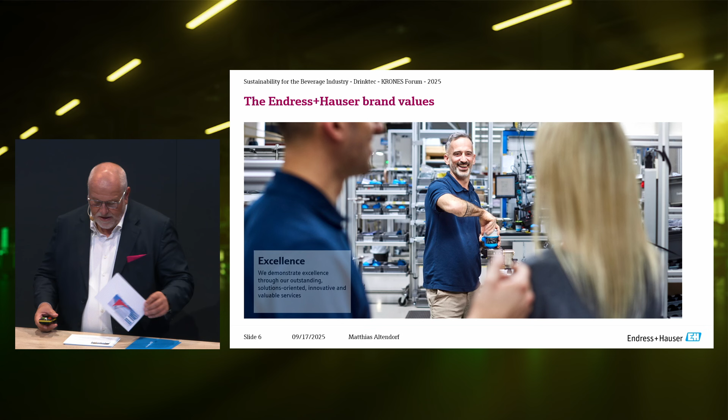We even have it in our brand portfolio, because Endress+Hauser has sustainability as one of our main brand issues, and we have had this for more than 20 years in our corporate profile. We believe we should not just live in today's world, we also have to make sure the future world is taken care of. We try to do this with strong commitment, excellent behavior, and always with a smile on our face.

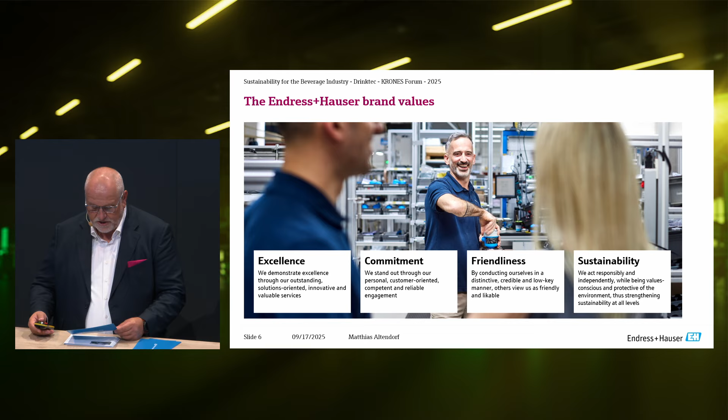Before I go to the different scopes of CO2, I'll start with scope 1, 2, and 3. We have a very powerful lever when we use instrumentation, and I'll give you a good example. Today in the measurement control world, we talk about 2-wire devices and 4-wire devices, and we can offer both. Both have advantages and disadvantages.

Basically 97% of our carbon footprint comes from the material of the products or the usage of the product. Only 3% we can really influence on the other side. So within that 97% of product usage, one factor is energy consumption. A 2-wire device, over 15 years, needs only 0.05 kilograms of CO2. But a 4-wire device, for example, already needs 2.3 kilograms, equivalent to about 2.3 years of a tree's carbon footprint. So minimizing the energy consumption of our products is one of our strengths, and that's one element.

Besides that, let me show you application examples of how we help our customers reduce their carbon footprint in manufacturing.

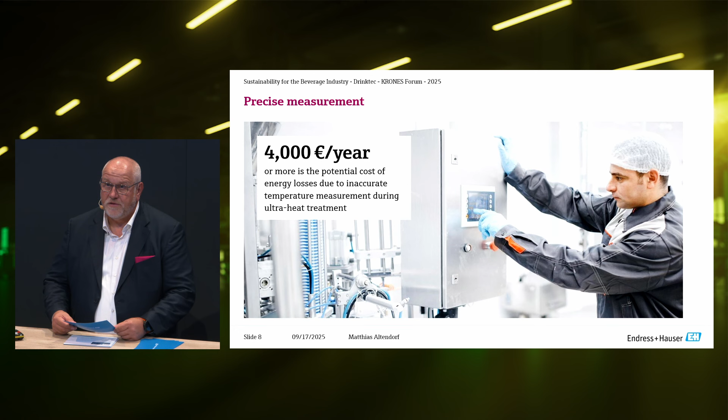Here's an example of precise measurement: you can save energy, raw materials, and cost. This temperature measurement alone can save 4,000 euros a year, simply because it's more precise and self-calibrating. Temperature measurement is very important for ultra heat treatment, as one example, in order to save cost.

Another example is the CIP process in the food and beverage industry, which takes a lot of energy, detergents, cleaning, and water. When you use Endress+Hauser products here, you can reduce the cycle time by 15 minutes, shortening the CIP process. We are able to do that with our customers, saving a lot of water over the day and over the year. But most importantly, we can produce many more bottles for the customer, creating much higher revenue. In such a case, for a normal drinking plant manufacturer, we can save up to €550,000 a year, which becomes very beneficial.

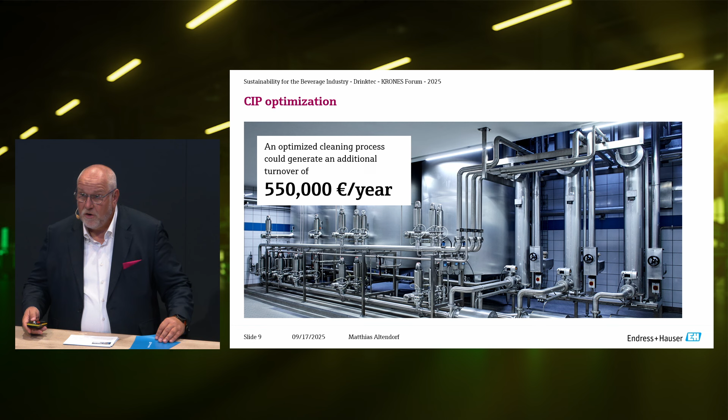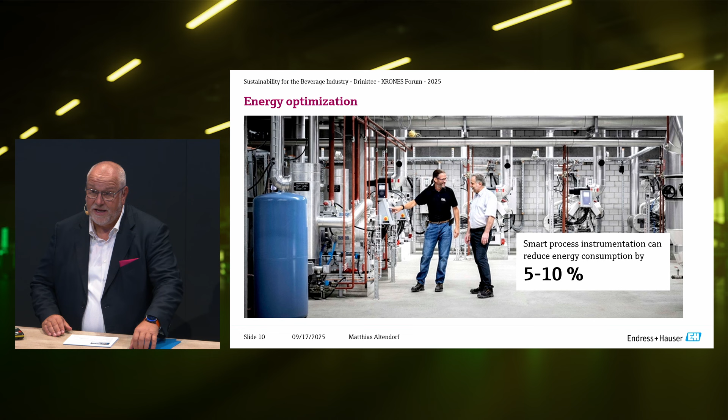When you look at the energy needed for production, a lot of people still use legacy-type heating, ventilation and air conditioning measurement to try to get good energy readings. But today, if you use process equipment, you become much more precise. You can measure variety and dynamics much better, and save up to 5 to 10% in energy consumption. We've proven this concept across all our factories—19 factories—and we changed them all over, so we can really say it works. A lot of our food customers do the same now, because precision helps you control the process better.

You can only optimize what you can measure. The better you measure, the better you can optimize.

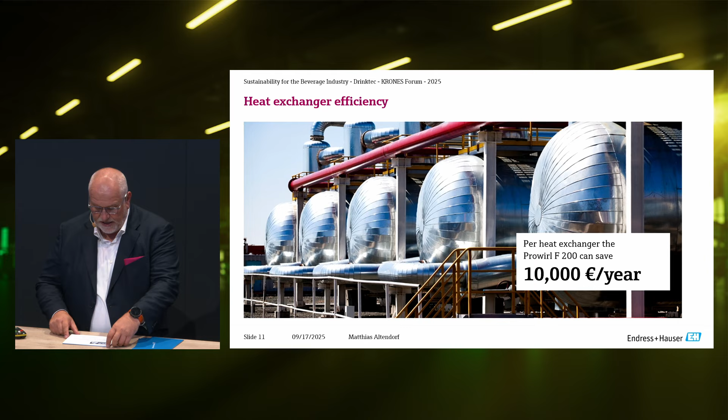Heat exchangers, we have quite a lot in the food industries, and it depends a little bit what you use. Traditionally, people use pressure transmitters to measure the flow of heat exchangers, but maybe for the condensed water you can use ultrasonic flow meters or vortex flow meters, and that helps you save 10% of the liquid water over the year, or helps you be more accurate. At the end of the day we can calculate 10,000 euros savings for a single heat exchanger over the year, and the return on investment is less than 6 months normally in this time frame.

But it's not just enough to say, okay, how can I adjust the processes? Of course, a lot of our customers also produce stainless steel. So we help our customers to produce green steel, using hydrogen to replace coke. And the aim is basically to reduce the carbon footprint by 95%. All around the world we are active in those projects because we would benefit as well to reduce the stainless steel carbon footprint significantly. And this is also our intention, that over the years to come, we reduce the carbon footprint through stainless steel.

In those types of equipment, you need a lot of hydrogen, you need a lot of electrolyzers, and they also need to be controlled and measured, and therefore we help the customer to do that. But electrolyzers also need water, and we are experts in water measurement to do that.

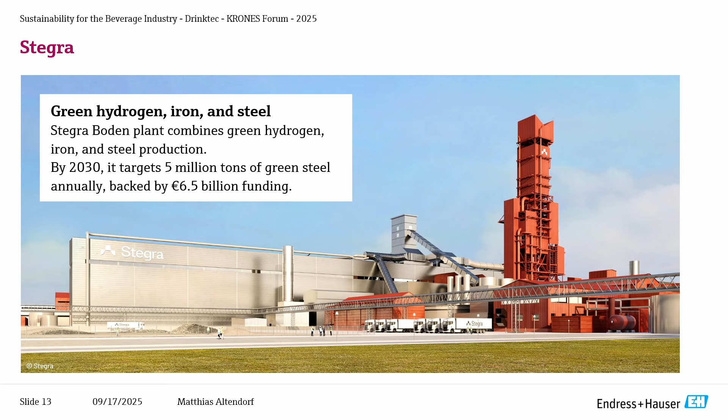When it comes to green hydrogen, iron and steel, you can see here the Stegra plant in Boden, Sweden, where people also want to produce these things, and we are very active in helping our customers produce CO2 neutral steel, which later on we all can absorb and use and recycle again, which makes it a much better thing. It's much easier for us today in the aluminum and steel world to use recycled material in Europe—up to 70% or 80%, and aluminum up to 90% is already recycled. We are not at that level when we look at the Asian markets, because the recycling rate is not as high at that point.

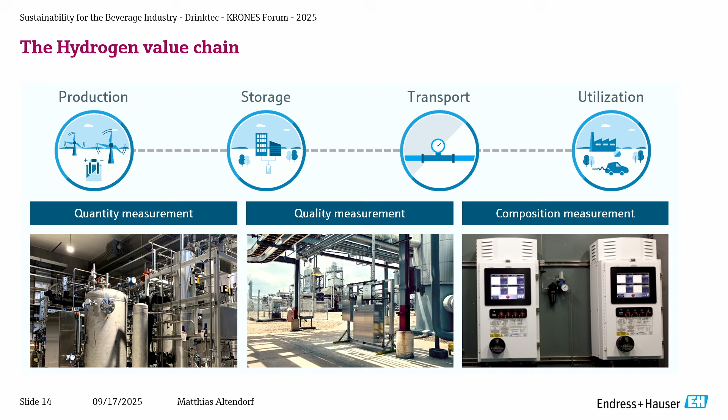When it comes to hydrogen, we help our customers measure it to reduce energy used to produce hydrogen. This is something completely different, and you can reduce it or produce it on the spot. You have to make sure the hydrogen has the right quality in order to use it, and also make sure you transport it and measure the values, and that the composition of the hydrogen works in a quite good way. So it goes from transportation to logistics to quality measurements of the hydrogen, which people then use to create energy or chemicals, and this is well needed. This also helps the customer save a lot of energy.

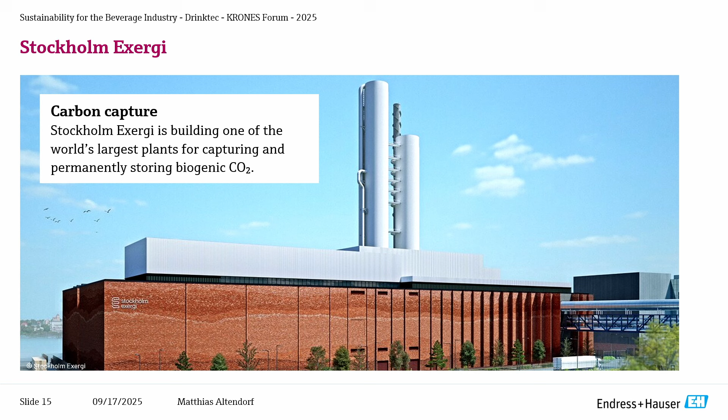But sometimes the process doesn't allow you to use alternative energies, therefore you have to capture the carbon footprint, capturing basically the CO2. You see here Stockholm Exergi, a leading Swedish energy provider, and they liquefy the carbon footprint and later on store it underground. Here we help on two sides: on one hand, they can use bio energy; on the other hand, we capture the carbon footprint with measurement and therefore reduce the carbon footprint of the energy they provide to their customers.

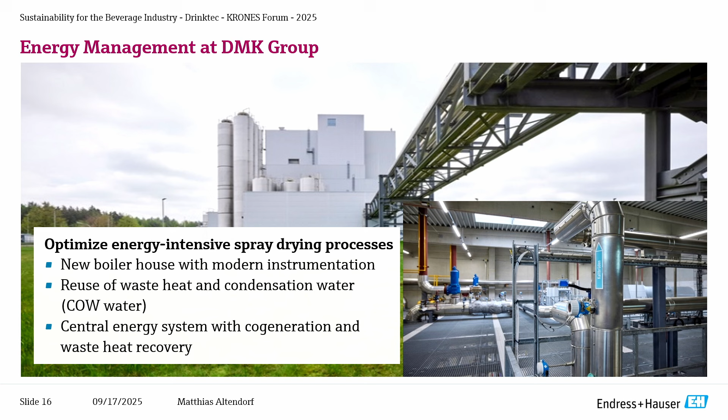Then you have a simple application of energy management at the DMK Group. Here they have a spray drying process, quite often used to make solid food at the end of the day. You can see a new boiler house with the new condensation water and central energy system. Here we are also able to help the customer significantly reduce the spray drying process and generate energy in a much more efficient way. This has helped this customer become much more sustainable.

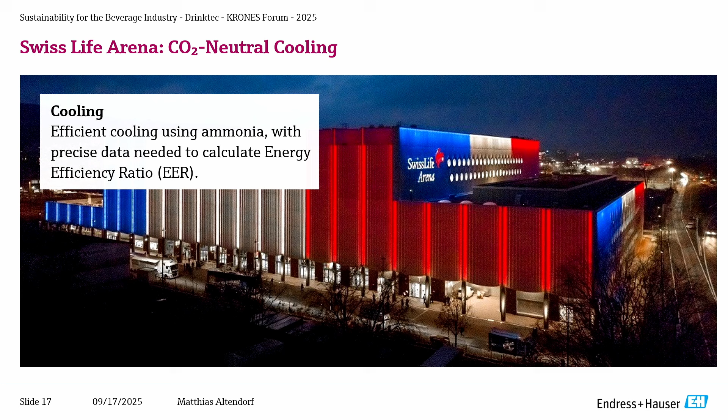But then we also have the buildings, as you can see here. This is, for example, an arena in Switzerland, and a lot of our manufacturing facilities or office buildings look pretty much the same. We're using ammonia here for the cooling process, and therefore you need much more precise data to calculate the energy efficiency ratio. Endress+Hauser provided the compact high-accuracy packages to measure flow, pressure and temperature for this calculation. Again, going from heating, ventilation and air conditioning instrumentation to process instrumentation helps you bring down the carbon footprint and save a lot of energy, just by starting to measure in a precise way.

Sometimes we don't want to store the CO2. Sometimes CO2 is quite vital for the process. Then we use it for feedstock and breweries, helping the customer to capture it, to store it. And then when the customer brews something, we try to bring it back into the process so that this brewing process becomes more efficient. And of course, it's much better if we reuse the CO2 than if we just leave it to the air.

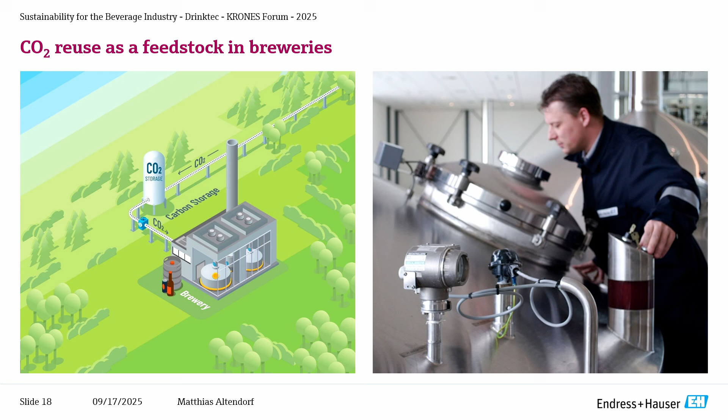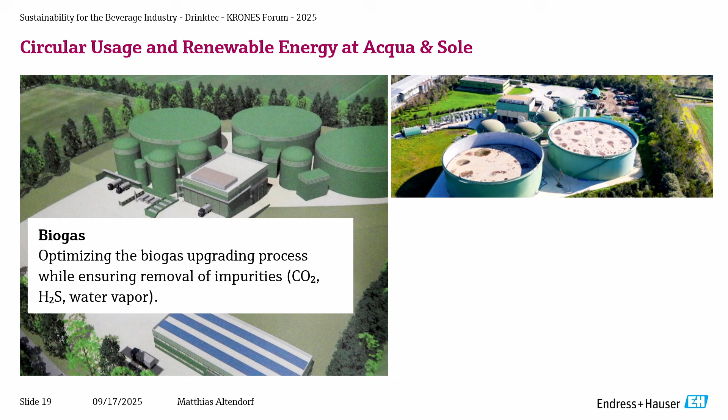In this space of reuse, you can see a lot of biogas applications meanwhile, because customers try to capture the biogas. This is an application out of Italy, where people capture the biogas and control it in a way to bring it to high quality, making sure that the CO2, the H2S, and the water vapor are in the right quality. Later on it gets to the gas grid of Italy, and people use it. Therefore we reduce significantly the carbon footprint, because methane is a much higher polluter than CO2 itself. This is one of the examples where you see circularity, or circular industry, and how process automation can help become better in the circular industry.

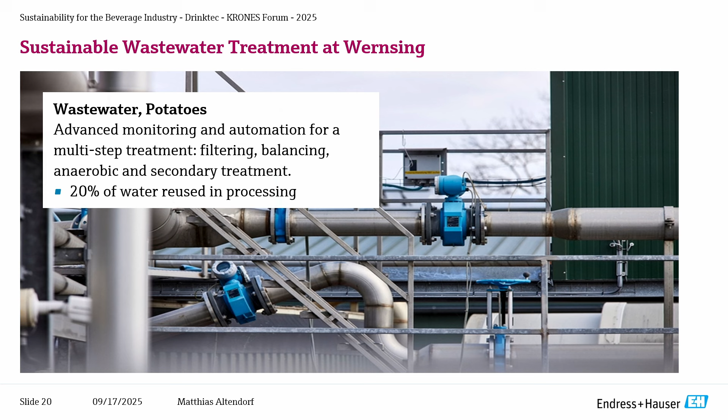Water is one of the biggest carriers of energy and the biggest carrier of things used. You can see here sustainable water waste management at a company called Wernsing. They make potatoes, or use potatoes as the products, and we help the customer produce 500,000 tons of potatoes annually, which needs a lot of water. So how can we find a way to reuse the water through advanced monitoring and multi-step treatment by filtering, balancing, anaerobic and secondary treatment? We also help the customer reuse 20% of water in processing over one year, which is quite significant. This means less pumping cost, less water cost, and makes the whole plant more efficient at the end of the day.

I come to the end, in the summary basically. Sustainability is a true business advantage. We believe in that, and we have proven that measurement can really help make customers better and more competitive in this area. It's driving things in the right direction, and I think the next step will be much more around circular economy, where we can help them.

Efficiency always starts with measurement. The better we measure, the better we can control, the better we can improve. You cannot control what you can't measure. This is a saying originally from Lord Kelvin, and it's still true today, and we try to practice that all the time. Our measurement makes data available, then we have to make it visible, and then we can make the process more efficient, sustainable, measurable and manageable at the end of the day. But importantly, we cannot do this on our own.

We need partnership, and strong partnership is key to net zero. We believe in this partnership, collaborating with our customers and suppliers to get to that point, whether it's dairy, soft drink production, steel manufacturing or energy transition. Together with our customers we can create solutions that cut carbon emissions, save resources, and deliver real business value.